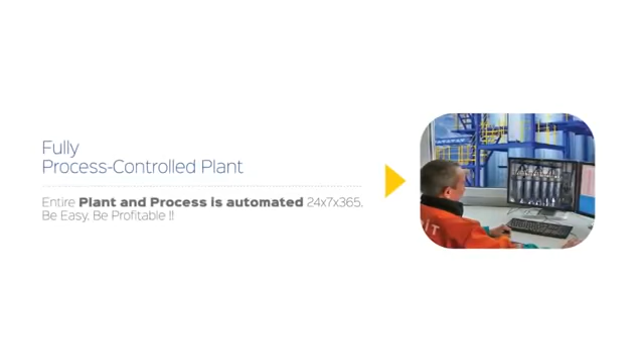Thanks to APIT for its innovative parboiling system, which can produce high quality parboiled rice based on global consumer preferences. APIT's parboiling system ensures the best rice in terms of quality parameters and nutritional aspects, along with proper hygiene process, nutritional preservation, and environment-friendly methodologies.

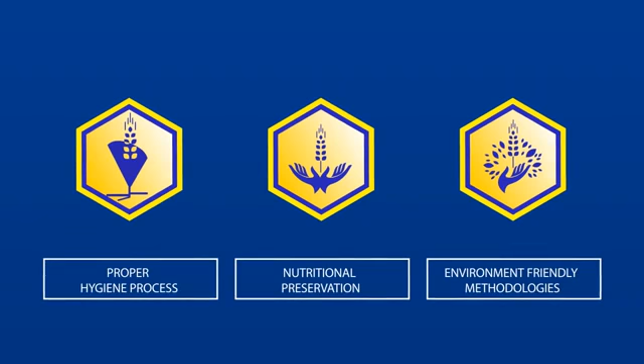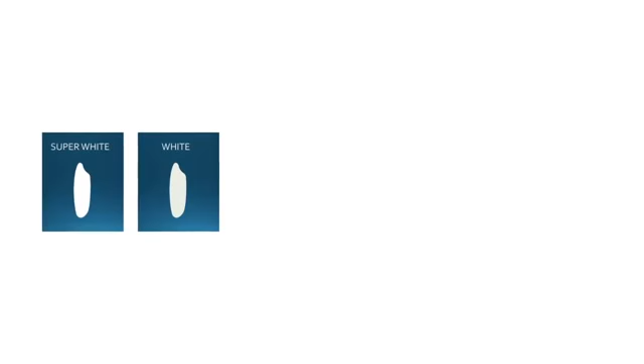APIT's parboiling system can produce all 6 colors of parboiled rice based on demographical demands: super white, white, cream, pale yellow, amber yellow, and golden yellow.

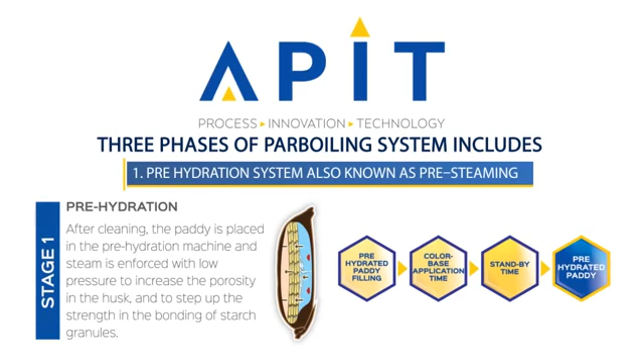APIT's parboiling system has a scientifically process-based infrastructure. The process is carried out in 3 phases. The first phase includes the pre-hydration system, also known as pre-steaming.

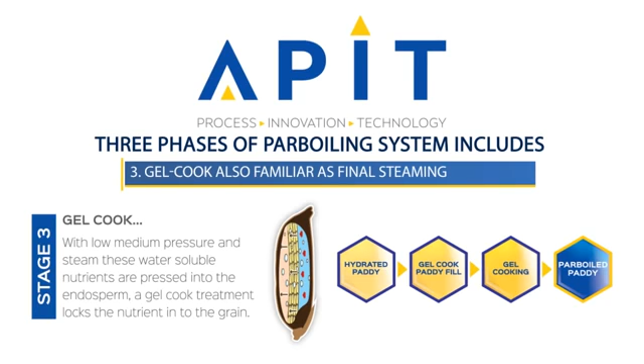Hydration is also known as soaking, and gel cook is also familiar as final steaming. Our complete parboiling process is driven by pre-designed process values from the world's first parboiling process design software, PROSE.

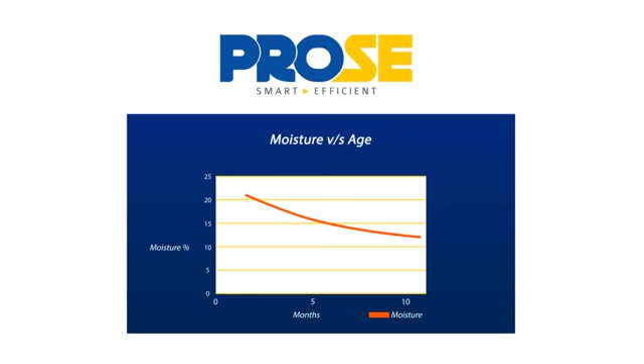Thanks to PROSE process design software for having more than 5,000 process design data points, which can be applicable for most of the global varieties of rice.

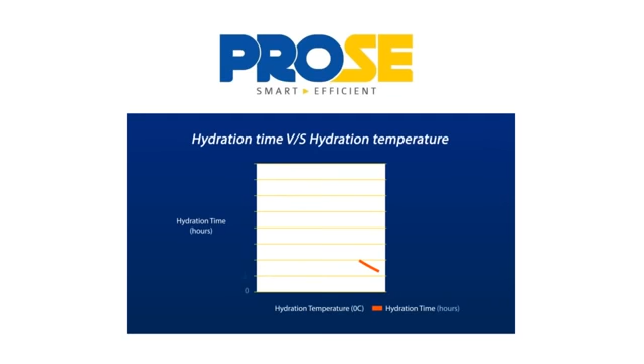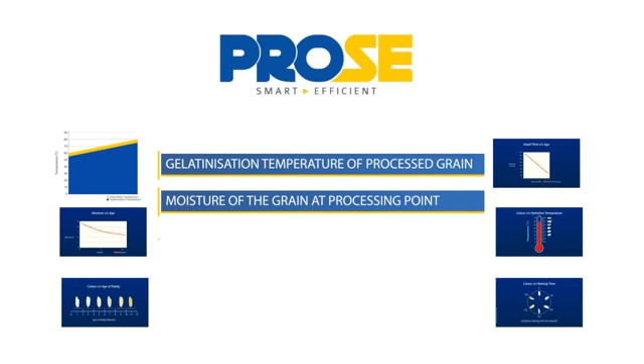Our PROSE software is designed on the basis of 4 crucial parameters of grain, which we call GMAD: gelatinization temperature of the processed grain, moisture of the grain at processing point, age of the paddy at processing point, and average density of the raw material in the machine.

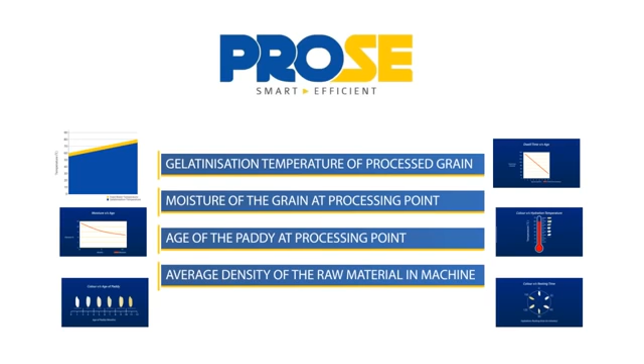Time, temperature, and pressure in the heat load depend on the moisture, age, and density of the paddy.

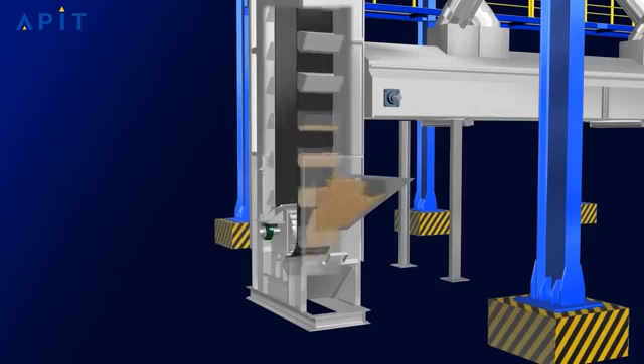The operation of the parboiling system starts with the feeding elevator. The feeding elevator carries the completely cleaned raw paddy to the chain conveyor, which transports the paddy to the surge bin. At the end of the conveyor, the buckets are emptied by gravity into the discharge section.

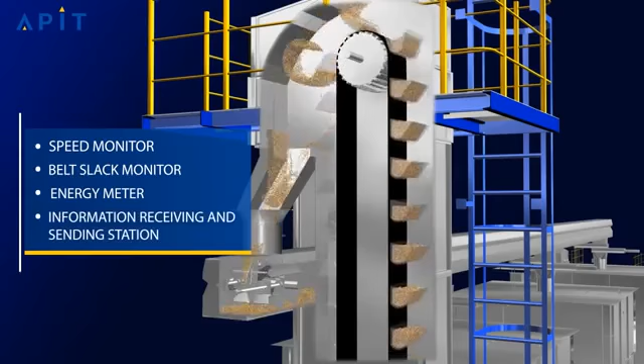The APIT feeding elevator is designed for higher efficiency of bulk material handling and is updated with the latest technologies like speed monitor, belt slack monitor, energy meter, and an information receiving and sending station. The feeding elevator transfers the paddy to the chain conveyor.

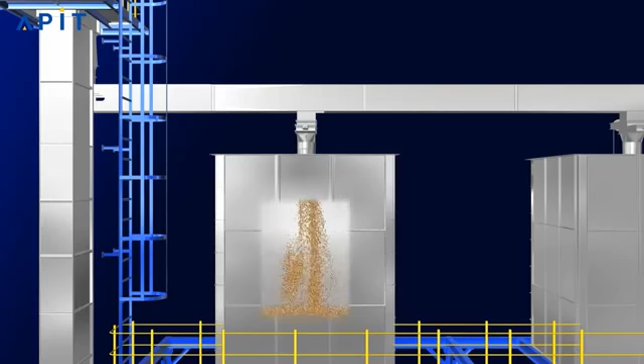APIT chain conveyors are best performing machines which receive raw paddy from feeding elevators and distribute it to multiple surge bins. Feeding elevators and chain conveyors are built with the latest technology, like a chain conveyor distribution mechanism having pneumatic slide gates with manual override.

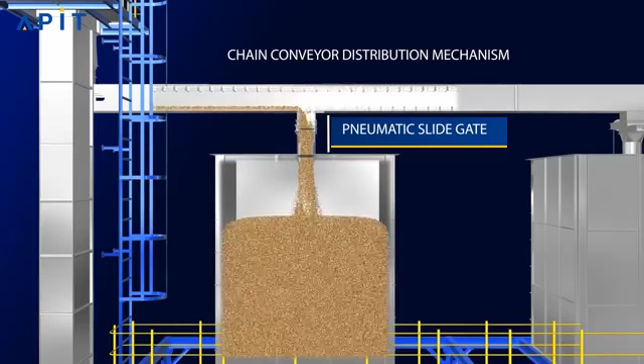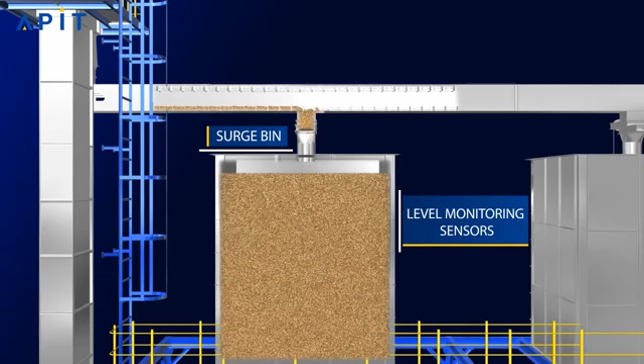Surge bins are fabricated for sufficient storage of raw paddy, and our entire surge bins are equipped with level monitoring sensors. These sensors stop the filling when it reaches a definite maximum level, and then the paddy is fed to the PHS tank. Here is the first phase of parboiling infrastructure, scientifically known as the pre-hydration process.

APIT's pre-hydration machine has a cylindrical top with a conical bottom and a scientifically designed steam sparger system which takes care of treating each and every grain properly.

The running capacity of the PHS machine is multiple times the holding capacity of the hydration tank. After filling of the paddy, heat load via steam is enforced with low-medium pressure through the branched sparger system.

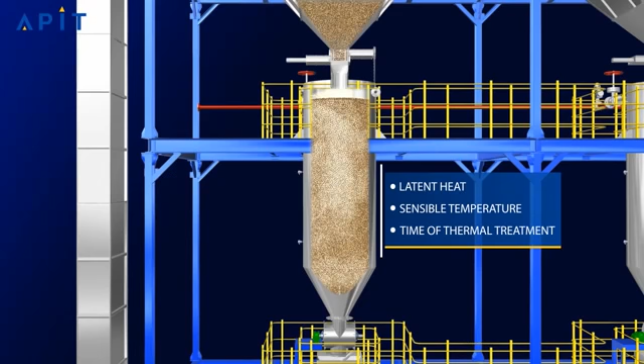After filling up the paddy in the PHS machine, the first volume of paddy is given thermal treatment. This thermal treatment depends completely on 3 parameters: latent heat, sensible temperature, and time of thermal treatment. Thermal treatment mainly ensures uniformly distributed heat load to every grain.

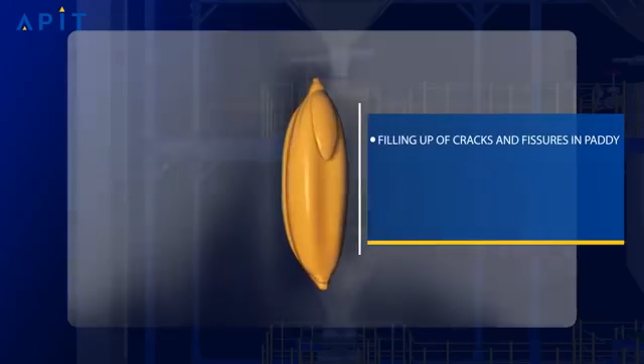Prehydration process of the paddy results in filling up of cracks and fissures in the paddy, and increases the porosity of the husk, resulting in an increased absorption rate of water that helps to reduce soaking time or hydration time.

When the thermal treatment coefficient reaches equilibrium, the rotary discharge valves start to open. From that point, the entire process is carried on the basis of first come, first treat, first out.

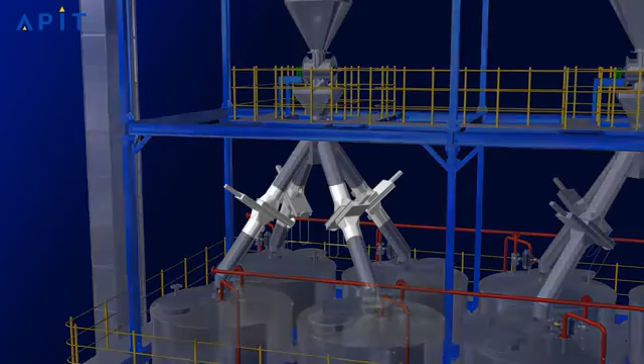APIT paddy hydration can be carried out in two ways: paddy first process, or water first process. In most cases, the paddy first process is generally carried out.

APIT hydration or soaking infrastructure consists of an auto hydro feeding mechanism, auto hydro circulation mechanism, auto-static hydrothermal temperature maintaining system, auto hydro draining system, and discharge mechanism, either auto or manual.

The hydration process is a very important process in parboiling. In this process, the grain has to achieve maximum gelatinization. In gelatinization, deformation of starch granules occurs.

APIT ensures that each and every grain will undergo a uniform gelatinization process in order to get a desired result in terms of color and hardness.

Hydration process is carried out in several steps: dwell or thermal seasoning, water feeding, water circulation, drain, and discharge.

After the PHS process, there is a process called dwell or thermal seasoning. After thermal treatment at PHS, the hydration tank receives the paddy. Once in the hydration tank, the paddy will be conditioned or thermally seasoned for a prescribed time based on consumer color preference. Dwell or thermal seasoning is done for base color application, mainly dependent on the age of the paddy.